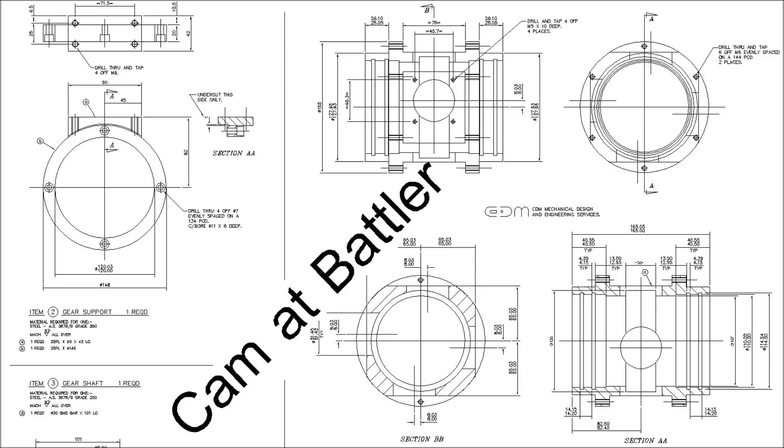Tomorrow we're punching up towards 40 degrees, and then on Friday we're cracking up towards 45 degrees, which is going to be around about 115 in the old money. So it's going to be too uncomfortable when I get home from work to be in here, so we're going to do a little bit in here tonight.

Just back off holidays, we've been back for about 3 days now. We've been down to Torquay for 2 weeks, had an absolutely wonderful time. We've been going down to Torquay now, the same spot for the last 16 years.

Where we stay at Torquay, we're only about 10-15 minutes drive from where we live, and people probably think, what sort of a holiday is that? But heading down to Torquay, to me, is like going into a bit of a time warp. It's very much still got the feel of the 50s and 60s down there at the beach. It's a place where you go down and you just tend to slow down, it almost forces you to, so it's a wonderful feeling down there, and yeah, we absolutely love it.

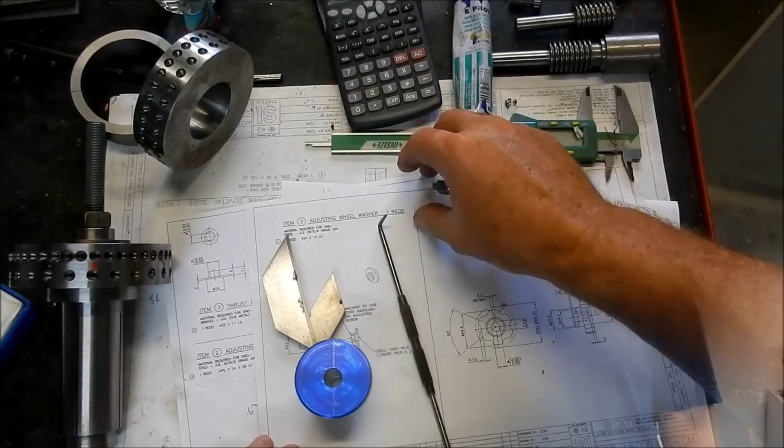Righto guys, we're going to start work on cutting these little notches out of this little knob. There's a number of ways we can do this. The easiest setup would be to put it into a rotary table and just offset it off the centre of the quill, and then just drop down with an end mill or a slot drill and cut them out. But I want to try and put that radius into it.

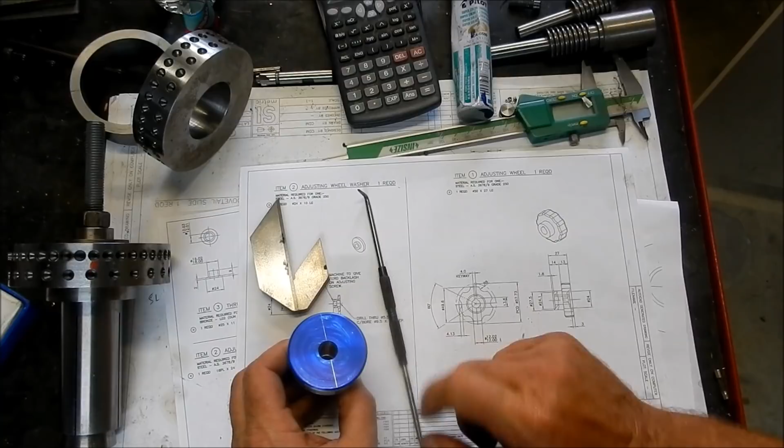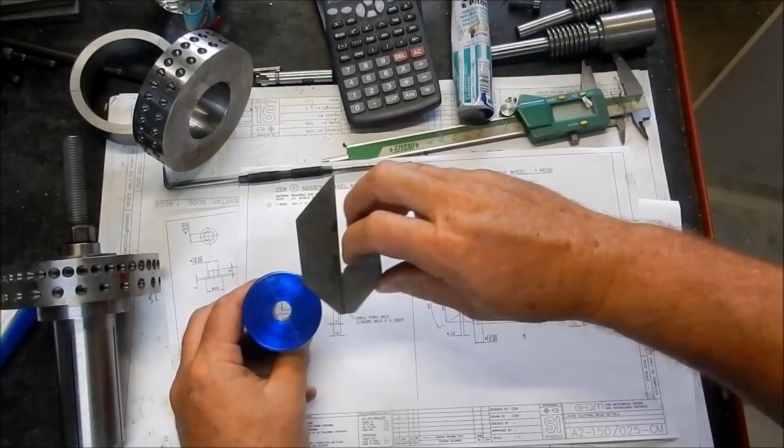Now I could hand file that and do it that way, but I'm going to do it a little bit differently. The plan is that I'm going to set this up with my indexer that I built many years ago onto the back of my lathe, and we'll index that around 60 degrees each time, and I'm going to mark my lines. I've already done the first line there just with the centre finder. We'll then mark our lines around.

Then what we're going to do is set this into a 3-jaw chuck and then mount that in a 4-jaw chuck to offset it for the radius, and we're going to actually machine those in, or bore those notches in. After I've bored them in, I can then come through and use my little radius cutter to put a nice little radius scallop onto that.

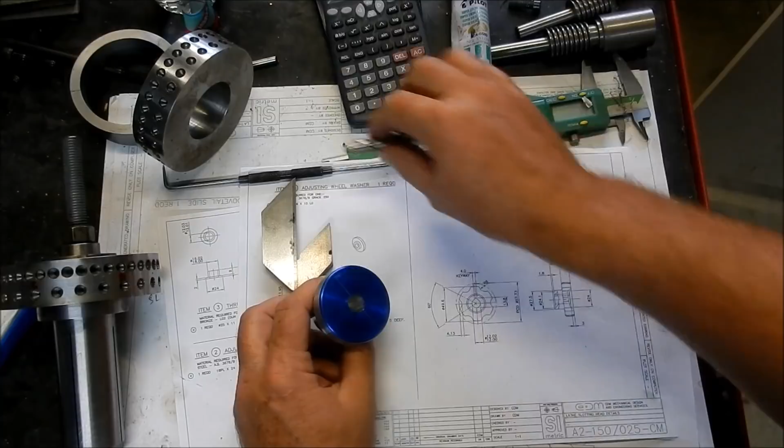Then we can index this around in the 3-jaw, line up our mark again, and cut the next one. We'll just continue around until we've got that done. So we'll see how that's going to work out. I'm hoping it's going to work out, but we'll give it a go anyway. It's just something a little bit different, and I'm not going to worry about putting the radiuses on the back end here. I could make up a tool and come in from the back and back cut it, but I'll just leave those the way they are, and we'll do the ones here on the top.

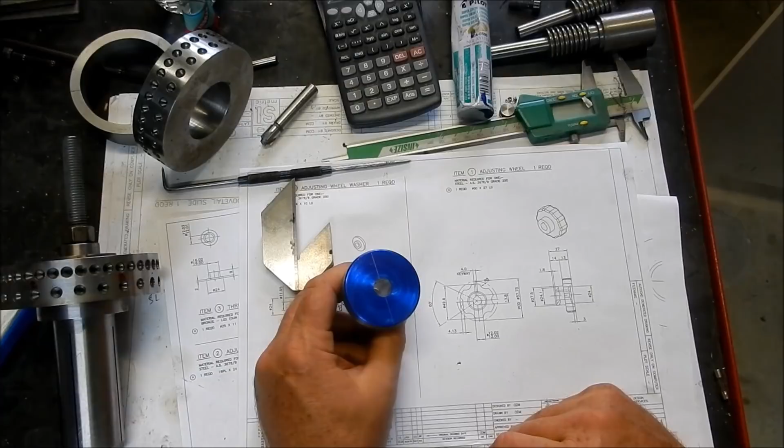Alright guys, we'll get the indexer set up, and we'll get set up to start scribing these lines around, indexing in the lathe.

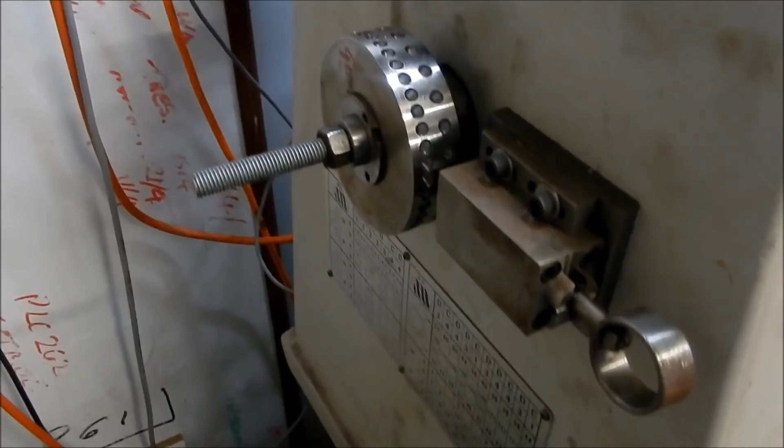Righto, so I've got my indexer set up on the back of the lathe. It's a fairly straightforward thing. It's just got a plunger which engages into the holes, and they're just done with a centre drill. I can make up as many of these as I like for any indexing. I've got a couple of others that I've made up for other jobs I've done in the past, and they work really, really well. It's a very, very simple setup.

So I've got that located into one of the holes, and we're going to go 60 degrees each time, so it's a 24-hole spacing I'm working on, and I've marked in red each of the holes that we're going to work to. So we come around the front here, I've got that lined up with that centre line that I scratched in, and all I'm going to do is rotate that around 60 degrees each time and then re-scratch the line.

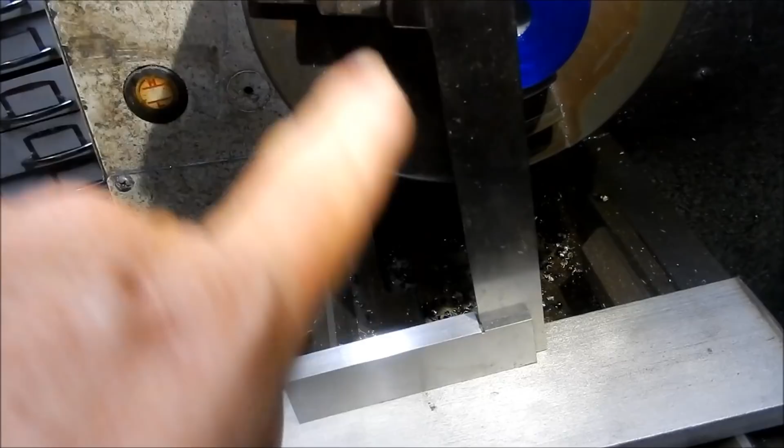It would have been easier to not have bored this out, I guess, and have a center point to come back to, but I've moved it around a number of times and it hasn't moved the square. So I'm hoping that each one has pushed the square up, scratch the line, rotate to the next one, scratch the line, and go through. Then we'll set up the 4-jaw with the small 3-jaw so we can get our offsets done, and we'll see if this is going to work.

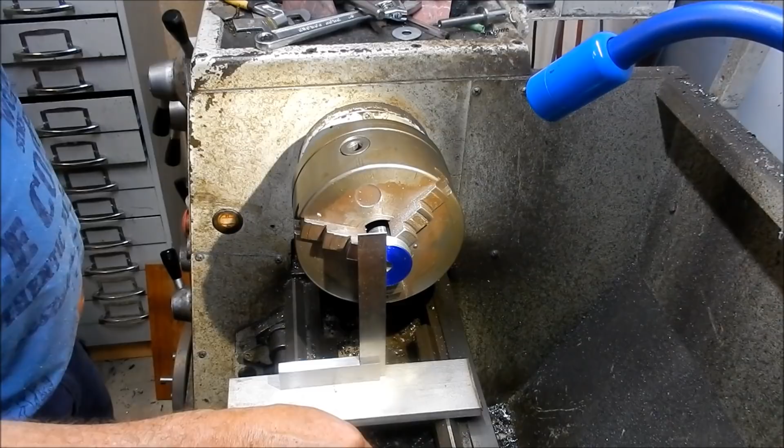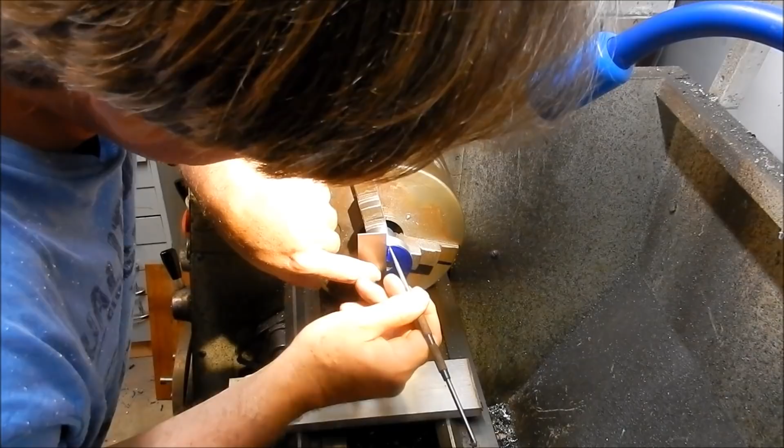Alright guys, back in a minute. I'll try and stay out of the way as much as I can. Alright, let's go to the next hole. You guys let me know if this square moves, eh?

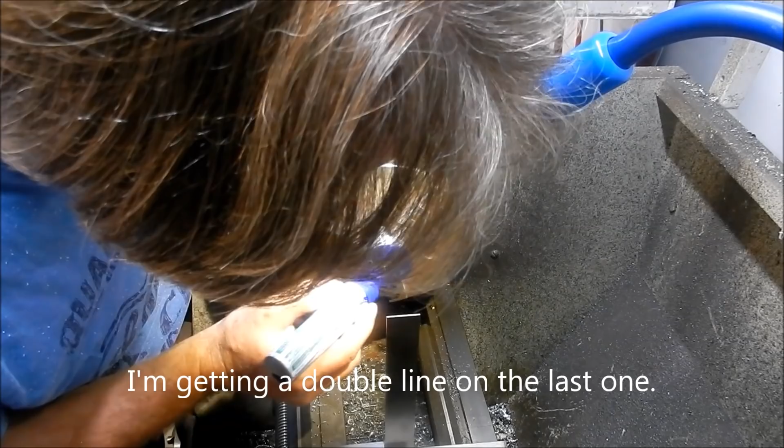Well, it's a bit of a mistake there, isn't it? I'll re-blue this again and we'll have another go. I've doubled up on that.

Let's go back to the start. Jeez.

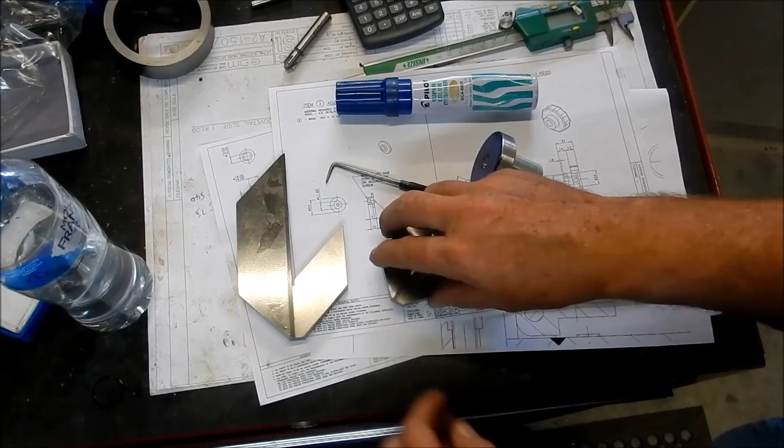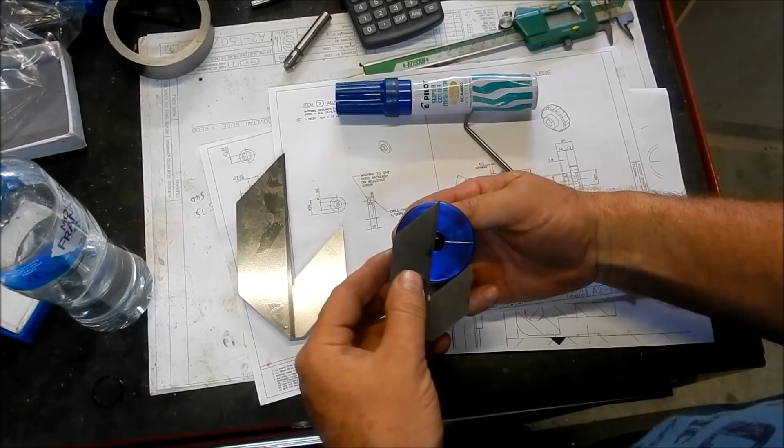Right, well, I found a big issue actually. This center finder that I've been using is out quite a bit. So if I was to put a line onto that and scratch it on, up nice and close to the blade there, and I was to rotate this around...

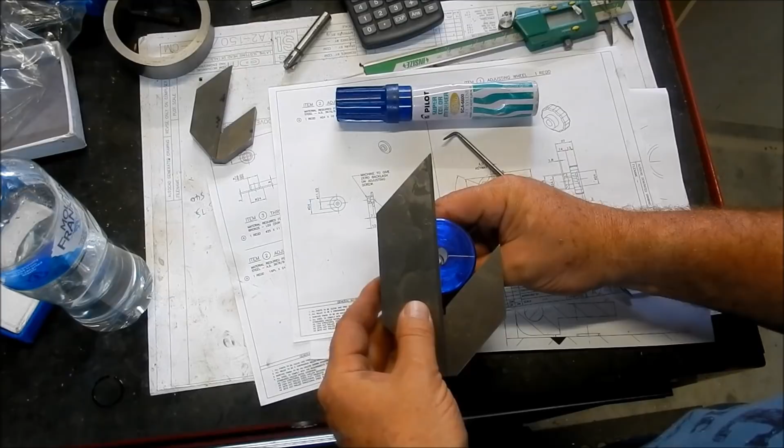That is out by miles. So now I hope of trying to get that square set up on the lathe. So I've used this one and I've scratched a line in. That's just cutting the line in half there. I rotate that around. Once again, that's just cutting the line in half there. So I hadn't checked these.

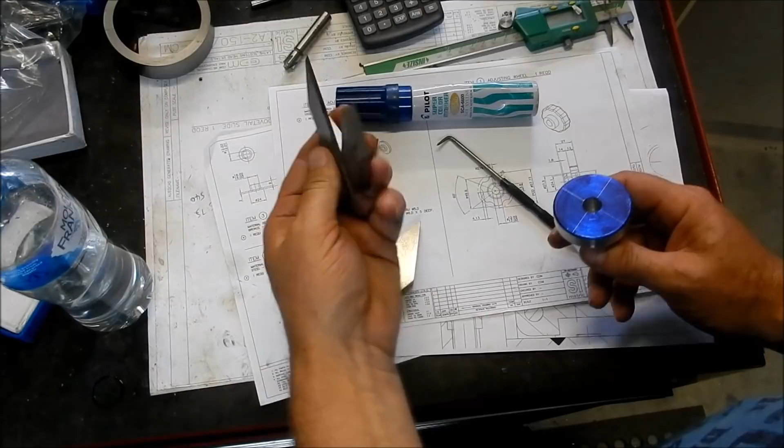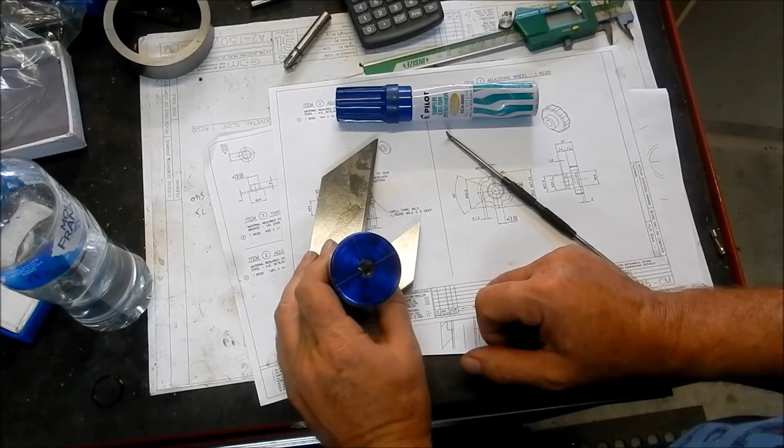They were from a dealer, a local dealer who buys stuff from China. They were pretty cheap, and obviously it's pretty nasty because it's out miles. Right, well what we'll do is we'll blue those out again and we'll start from scratch again. That's why my square was so far up the creek when I'm trying to scratch these in. I'm getting double lines when I rotate it around. So something to be aware of.

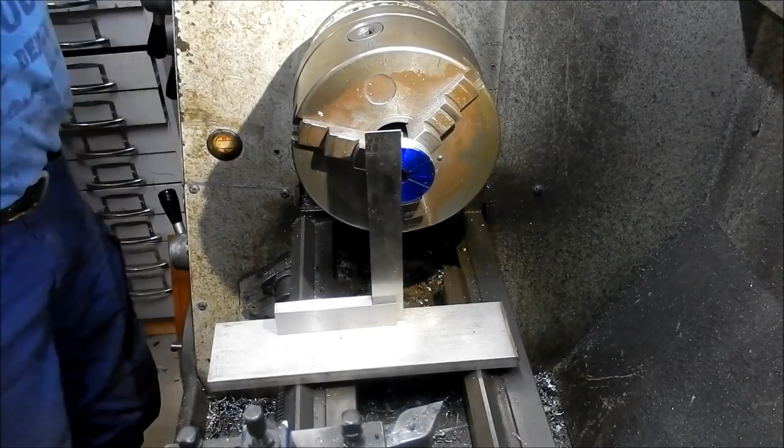Alright, let's go again. That's good. That's good. Alright, so we've now got that indexed up. I'll tell you what, I've only used this a couple of times and I've never actually checked it, so yeah, when you get tools guys, check them out. Make sure they're not going to give you some false readings like this one has.

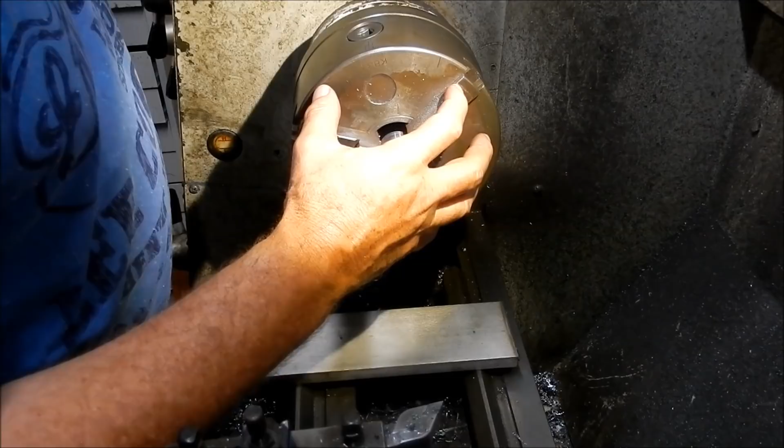Right, so now we've got some line work we can set up to. We'll get the 4-jaw put in and we'll get a 3-jaw mounted into that, and then we'll set up an index in the back again that we're going to come back to each time when we rotate this around to cut the scallops. Hopefully it'll become clearer as we go. Let's get into it. Alright, let's have a look at this conglomeration of a setup.

So I've got the 3-jaw clamped in by the 4-jaw to give me my offset, which was 91.6 off center. So I've set that up using my height gauge and I've got that pretty spot on.

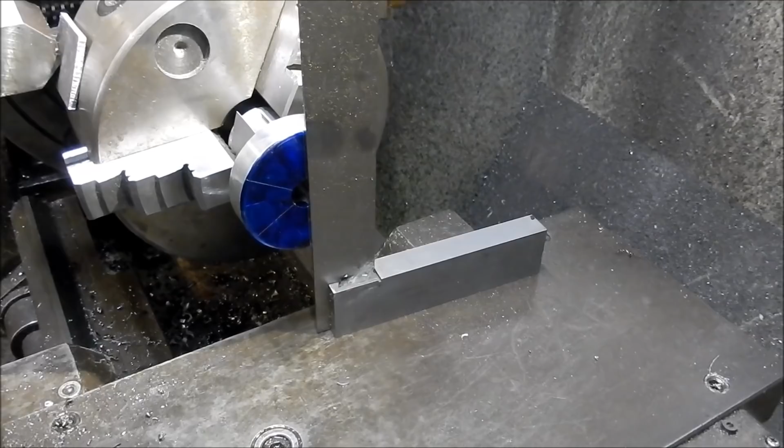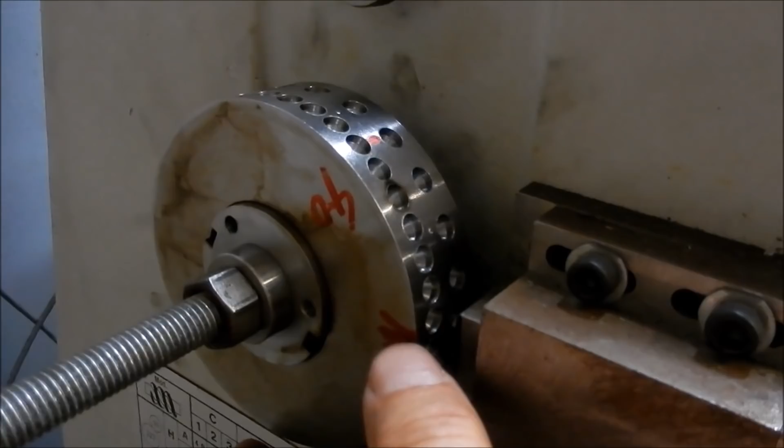With our lines that we've marked, the plan is that I will line up each one individually and rotate it around, but I need to come back to the same set point every time on the 4-jaw to get this right. So come around the back, I've got that locked off with the indexer, and I've marked that one. Each time I will re-engage, loosen off the 3-jaw, rotate that around by hand until I get the lines to line up, then clamp it in again, and continue through with the bore, and continue going around until I've got all 6 lobes done.

In between that, obviously when we bore, we're going to set up with our little radius cutter in there just to put that nice little chamfer on, or that nice little radius on. Alright, we'll get set up and get the boring bar in, and yeah, we'll give it a go and see if it works. Right, I've got this set up with the boring bar.

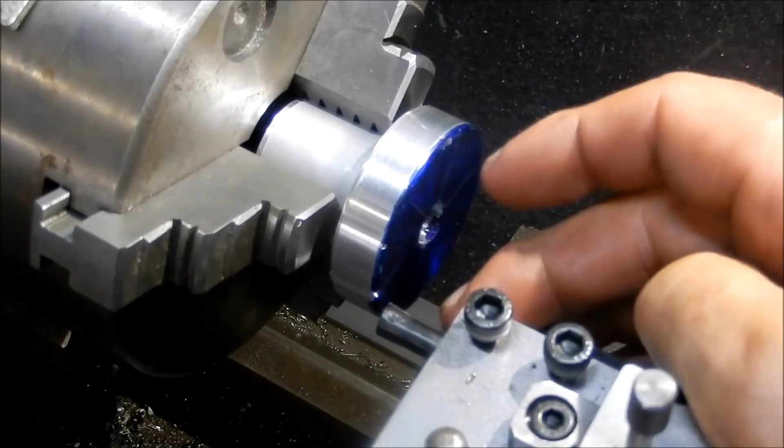I've got this upside down at the moment so that it's cutting in the right orientation. I've already just taken half a mil off that. I've got 4 mil deep is what I've got to go. We'll run it through and we shall see how we go. Great thing is, doing it this way I can at least run my machine forward, so I'm not going to make a mistake.

Now, I don't want to run this any faster. There's a fair old counterweight effect on this. Righto, so that's cutting quite nicely. I'll continue this on and we'll bring you back when we're getting closer. Right, we've just got 0.1 of a mil to come off this now, so we'll index that in and we'll do our final cut and set up for the radius.

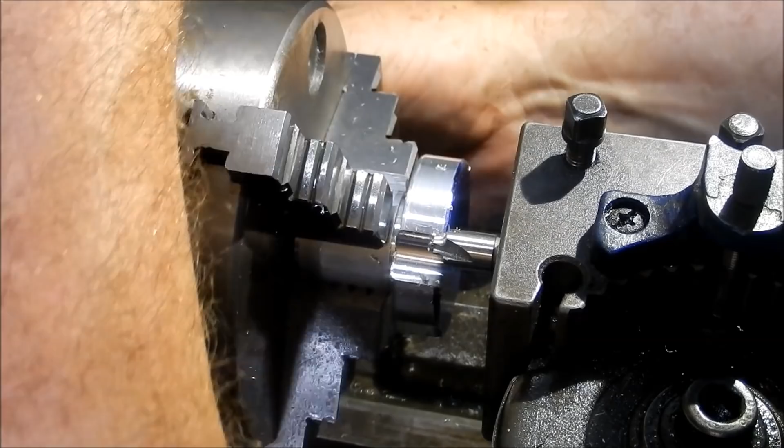Alright, I think that'll do us. Let's put a nice radius on that. Right, I'll set up for the next one, and what I'll do is I'll continue going around and I'll bring you guys back when we're at the last one and we'll see how everything's looking. Alright guys, we'll see you soon.

Righto, we've got one more lobe to do and look, they're coming up absolutely brilliantly. I'll take you through what we're actually doing. So, let's see how we go going handheld here.

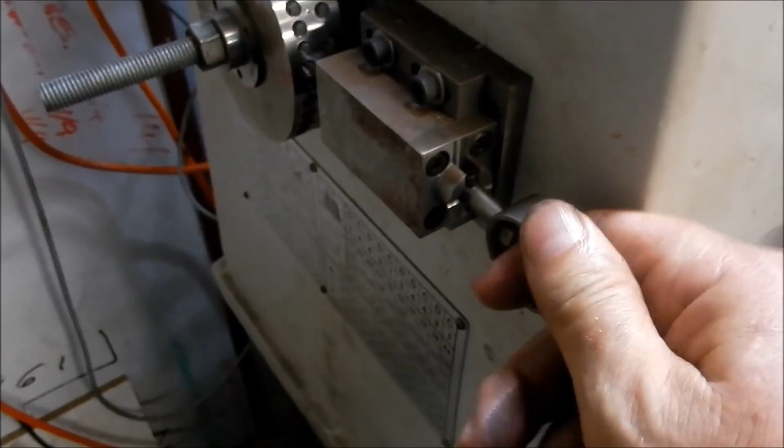So, what we do is we come around to our set point, which I've got marked there with the arrow, just there. We'll just engage our pawl, which it is now, so that locks off our 4-jaw totally. I'll set you up on the tripod now and we'll just go through the rest of the setup.

Right, so we've got our chuck locked off. I'll just release the 3-jaw so we can rotate this around, and I've actually marked an arrow on here so I know that I'm always pulling this towards me to the next line. That's that. So we lock that off.

Set up our boring bar first. Make sure we disengage our pawl. As I said, I found out what happens if you leave it engaged. Now we'll come across here and just check our zero, so I get that roughly there. Bring that up and I'll just do a scratch on the OD here, and that just lets me know if I'm within a bull's roar. Right, so you zero that off. We know we've got to come in exactly.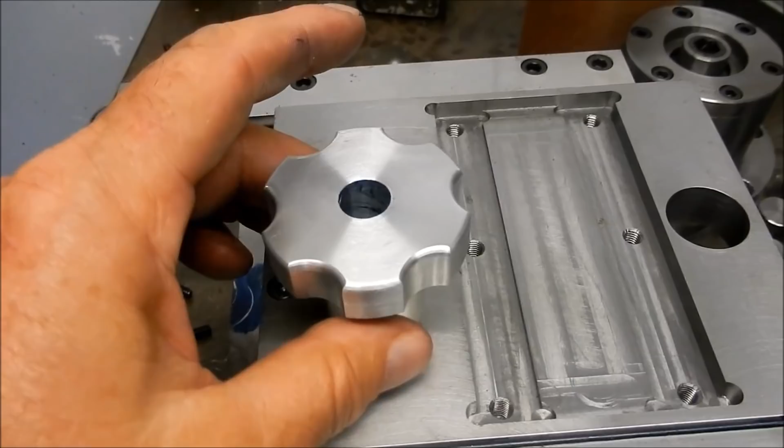Alright, so that's the knob all finished off, and I'm absolutely wrapped with how that looks. That is the absolute bee's knees. So that's finished, we've got our screw finished.

The next thing I want to do is cut into here the little indexing lines. I've left this overall a little bit longer than what it needs to be, so I can do a bit of a practice run. Put it in the lathe, we'll part it off to length and then set it up and do it properly. But no, that's come up really, really nicely, so it worked out well. I'm really pleased with that.

Alright guys, so we'll get set up for the next operation.

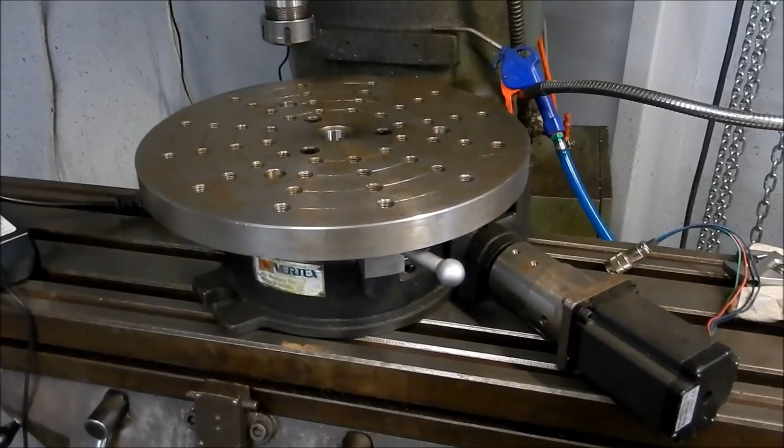Alright guys, before I start stripping the table down, I'll quickly show you the setup that I've got on this rotary table. It's a Vertex rotary table that I bought 6 or 7 years ago, one of the first purchases that I made. I made up the adapter plate for the top, and I've since learned these are called pallets, but I machined this up in the lathe. This is out to the maximum swing of my lathe, and I machined that as a friction drive to get it to the ODs, and it's worked out really well.

It's pretty spot on, so that certainly increased the capacity of this, and I've just drilled and tapped half-inch, M12s into this, so I can put clamps all over this to hold all the various setups that I use down onto it. And if you have a look at Joe Pieczynski's channel, he's doing a series now on the rotary table, so if you want to get some really good tips on how to do setups on a rotary table and how to use a rotary table, go and check out his channel. It's absolutely brilliant, looking forward to that series. I have stepper drives, so I have electronic indexing on both my rotary table and my dividing head.

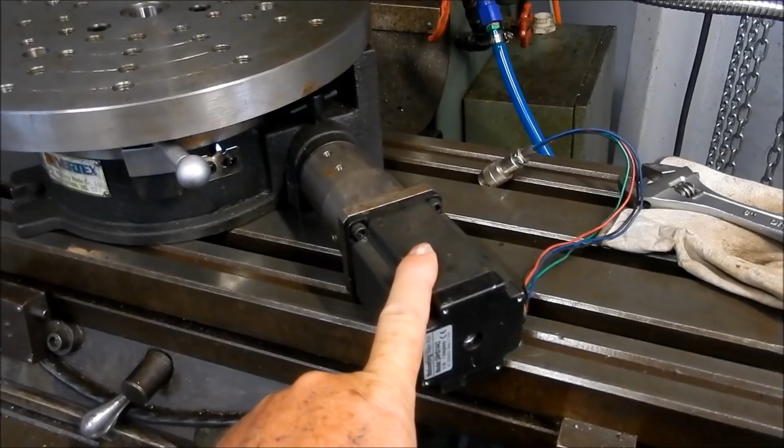That's the brain box. I made this many years ago. There was a hex code available on CNC Zone by a guy called Steve Ward, who went by the synonym Quackers. I think he's got his own website now and is actually manufacturing these and selling them, a lot more progressed down the track than this one here.

But yeah, this one I made very, very cheaply. It's just got a bit of A4 sheet of paper that I've printed out and laminated for the keyboard cover. So all up, I think the whole thing cost me less than $100. Well worth it for me, and it was a good learning exercise.

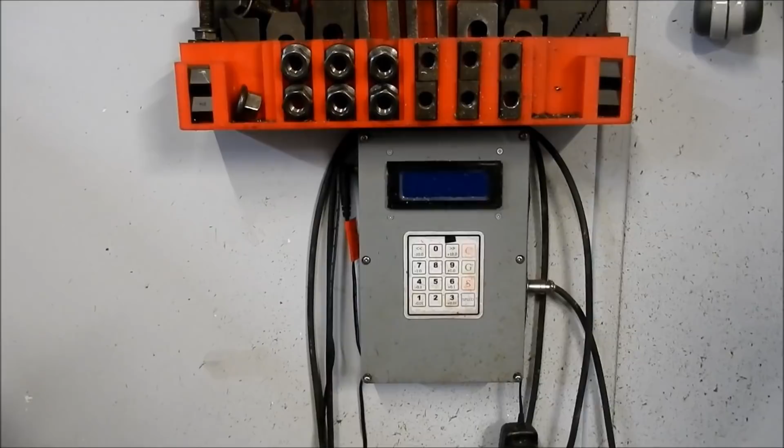So I certainly wouldn't go back to manual indexing after using this. As I said, it does both divisions and also degrees, up to 9,999 even divisions. So it's a pretty amazing piece of kit.

All right, I'll break this down and we'll get this set up with the 3-jaw, and I might take you through how I set a 3-jaw up on this to get it concentric to the actual center line of the table. All right guys, we'll get this broken down and we'll get into it.

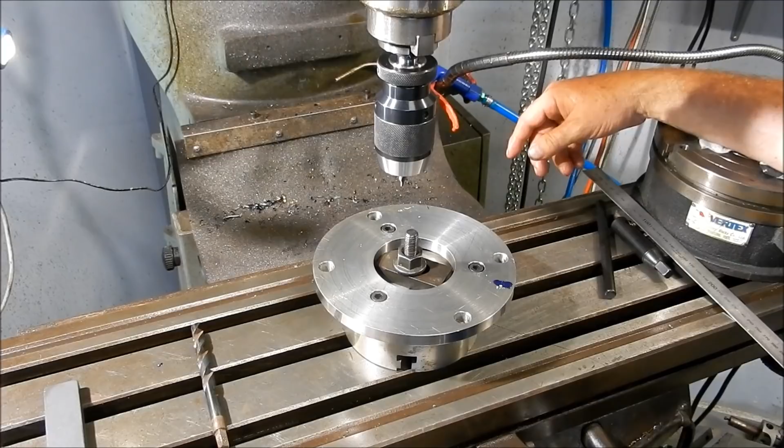Right guys, as often happens in the workshop, to do a job you've got to do a job. I want to mount this 3-jaw up on my rotary table, and I've done the holes in here so they can match my table in some different configurations for some different setups. But I don't have any holes at 120 degrees where I can mount it in my rotary table.

I do have a chuck that I mount in my rotary table, a 200mm chuck, but I've got that set up with a back plate with the camshafts on the lathe, so I don't want to break that setup.

So all I'm going to do with this little 3-jaw, the one I mount down on my table to do any indexing with the digi readout, is make a PCD of holes around here, 3 evenly spaced holes to line up with the slots in the rotary table. There's no great accuracy needed, because I want to be able to move this around very slightly to get it centered up onto the rotary table so I can lock it down in place. So we'll quickly go around, create this 3-hole PCD, and then get this mounted up onto the rotary table.

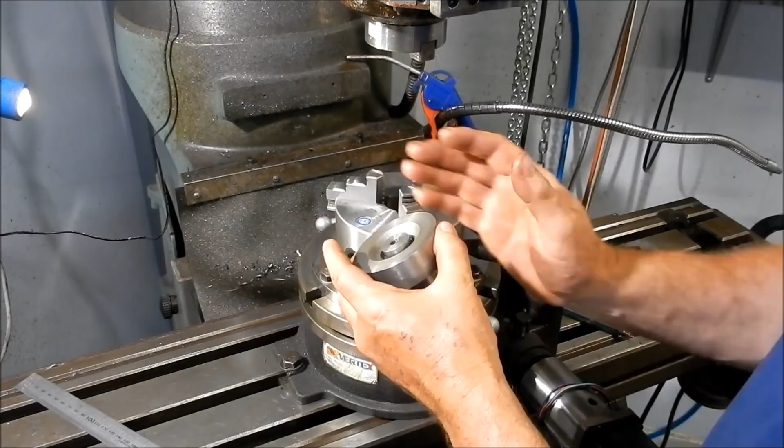Righto, so we've got our 3-jaw just loosely mounted on there. I've got a series of jigs that I use on this rotary table, and this is one of them. It's a Morse taper that I've machined up that fits inside there, which has got a parallel section. But I've got different jigs for doing all sorts of radial offsets and linear offsets, a series of different jigs I use for different setups for referencing and setting up on this rotary table, and it's pretty accurate.

So with this one here, because that's on a Morse taper, let's pull that right on there. We'll just drop that down inside, get it a bit snug. Once we've got it snugged up, we can then bring the jaws in on our little round bar, just lightly nip it.

We can go through, just re-engage that worm, and just go around and nip them up.

Right, what we'll do now is I'll put a bit of round bar in there, a bit of precision stock that I've got, clamp it up, and then we'll set up the little lever indicator and run that around and just see how that clocks up.